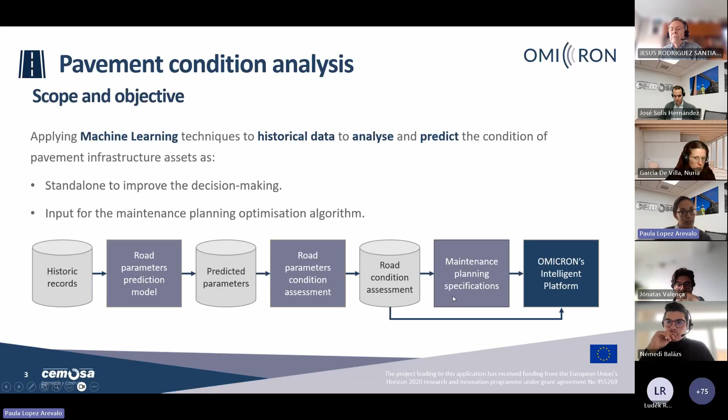Well, now we will go briefly over the methodology applied for this analysis. The first step is the data preprocessing and exploratory data analysis. Whenever we're working with data-driven techniques, there is an internal process with the data for analyzing and managing the available data. The raw data is received, stored and preprocessed to obtain an adequate and efficient structure to work with. And exploratory data analysis is also an essential step to analyze everything that is available. In this case, we get information from inspections: International Roughness Index, side force coefficient, and texture indexes.

And the next step is the data process. In this step, which is an extensive one, there is a series of data science methodologies that need to be applied on the data, which I won't go into much detail on, but are related to the evaluation and parameter selection, the data structuring, rounding, outlier analysis, missing values, and feature selection.

The next step is the approach and model selection. Well, there are different ways of constructing the models in relation to which parameters are introduced, how they are interconnected, and the different time steps that can be selected. And each one of these ways of doing it is what we call approaches. In this analysis, we've tried 5 different approaches. Besides this selection, after exploratory data analysis is performed and we understand the quantity and the quality of the data, different models can be applied. In this case, a linear regression model, decision tree, and random forest are analyzed. And in the end, the model and the approach which provide the best results will be the selected methodology.

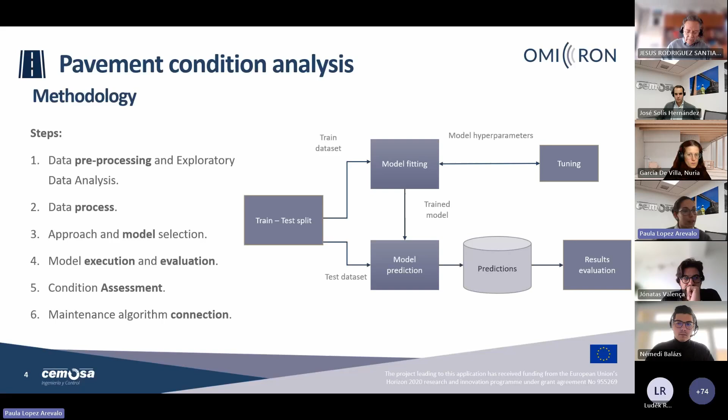In this case, the pavement prediction is based on its input, which is inspection results related to data points. We need to work with that to provide a more adequate structure, which is small segments that can be used by any type of algorithm, any kind of optimization, and any type of methodology that this or any other company may want the outputs to work with.

Here we can go briefly over the results and conclusions. Of course, all the 5 previous approaches, all the models, are executed, and the best results are provided by the random forest algorithm, and also the approach on the right, where you can see how the different input variables and outputs are connected. This model and this methodology provide a mean absolute percentage error of 5.6%.

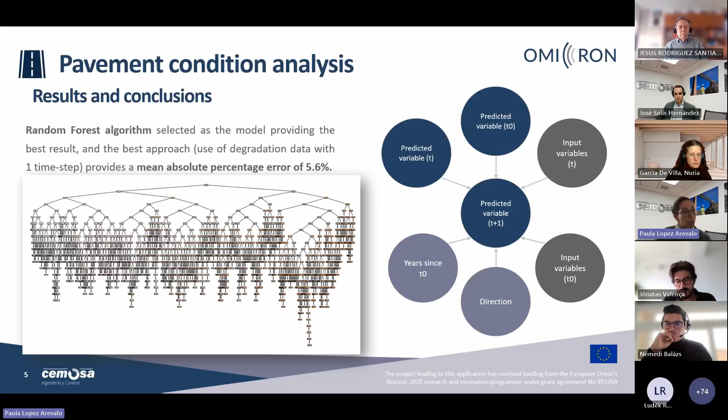Just to summarize, on the left figure, you can see an example of one of the decision trees from one of the random forests that is used for one of the predictions. As conclusions, 2024 road parameters data and road condition indexes are predicted for the road and integrated within OMICRON's platform as a standalone feature and used within the DSS.

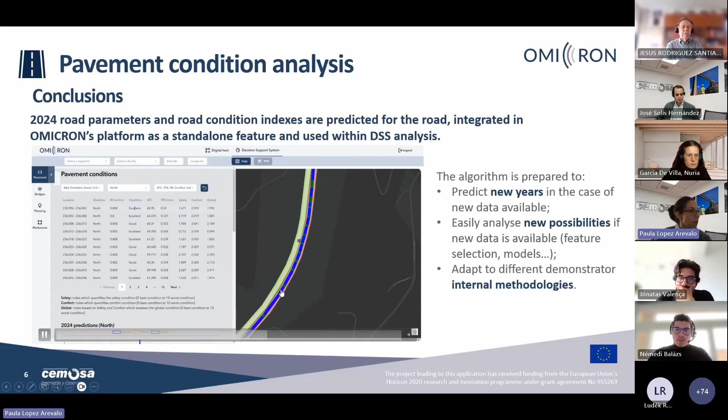Our partners already showed the overall platform, but we thought it would be interesting for you, now that you understand the algorithm, to see the results. On the GIS, you can see different colors showing the state of the road. And on the left side, you can see the different parameters and predictions for the indexes and the parameters in different tables and different graphs.

This global methodology is designed to be modular, allowing for adaptability, transferability, and easy modification. As you can see, new years can be included if they're available, new possibilities if new data from other assets is available, and it can also adapt to other models.

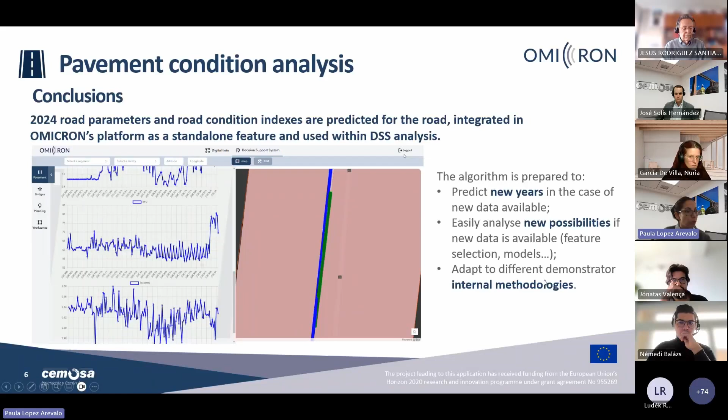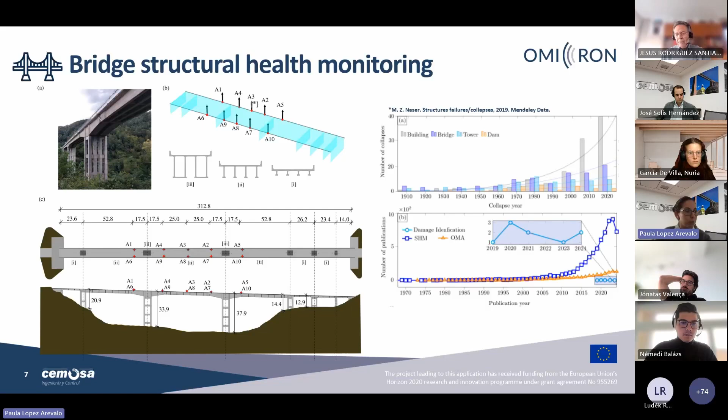This slide shows briefly the workflow of the structural health monitoring applied. As you can see, the first step is the operational modal identification of the bridge using the information coming from the sensors: resonance frequencies, mode shapes, damping ratios. Once these modal parameters are calculated for the different time series signals, it is necessary to remove the environmental and operational variables and to apply the damage identification and damage detection techniques.

Simultaneously to this analysis, a finite element model is created and updated, taking into account the geometry, the materials, and the boundary conditions of the actual bridge. The continuous updating of this model is what will provide the structure stiffness in different areas. I will present all of these parts of the analysis in more detail now.

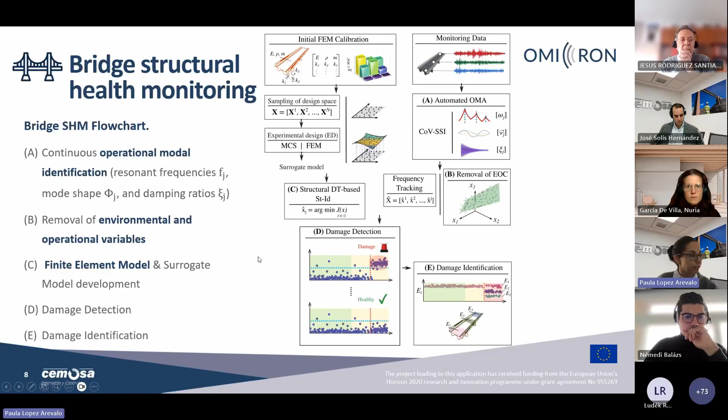As I commented, in the first step of the identification, the baseline dynamic properties are obtained using a time domain technique. In this case, the modal properties obtained are shown on the right side with the 8 modes, which relate to 8 different frequencies and damping ratios.

This first baseline dynamic properties identification is performed, then this is done for all the signals of the monitoring period. The results are statistically analyzed, and as you can see on the bottom part of the graph, they are also clustered. This means that in the end, we will have the evolution of the different modal parameters with time. And as you can see, they are clustered with different colors.

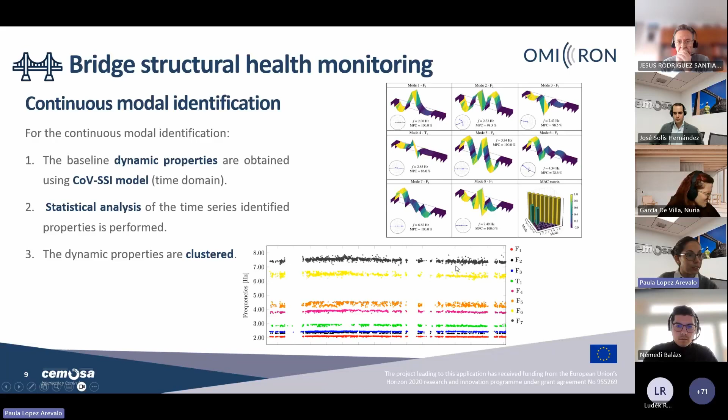The next step, as we mentioned before, we found different day-night cycle, repetitive manners within the data. This shows that there are some external environmental factors that are not useful for the structural analysis that need to be removed. For this, correlation analysis between the independent environment variables and identified properties are analyzed. The air temperature is selected as the proper feature to remove these kinds of effects. And the methodology that is used to remove this effect is a multiple linear regression model.

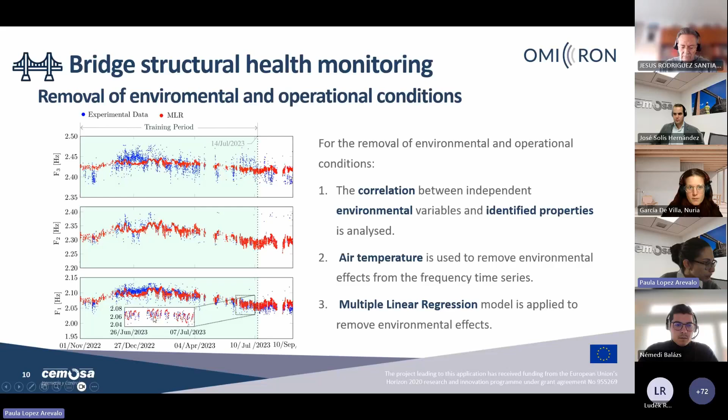In the left, you can see, for 3 of the frequencies identified over time, how in blue the experimental data is showcased and the output from the MLR model. In the zoom, it's easier to see the trends that we mentioned before that needed to be removed.

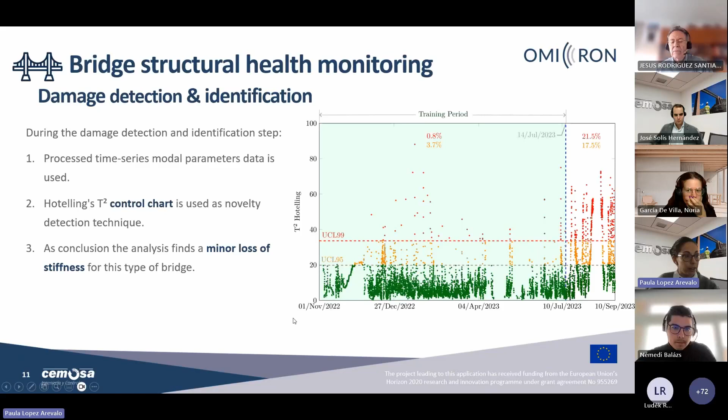Simultaneously, a finite element model, which follows the geometric properties, material characteristics, and boundary conditions of the model, is developed and is calibrated with sensor data. Once this model is correctly calibrated, a meta model is used for the continuous updating, which provides the stiffness multipliers as outputs. As no real data from a damage can be accessed through the monitoring system, synthetic damage scenarios are generated. These synthetic damage scenarios are inserted within the model, and after the trial, it can be seen that the damage can be both identified and located.

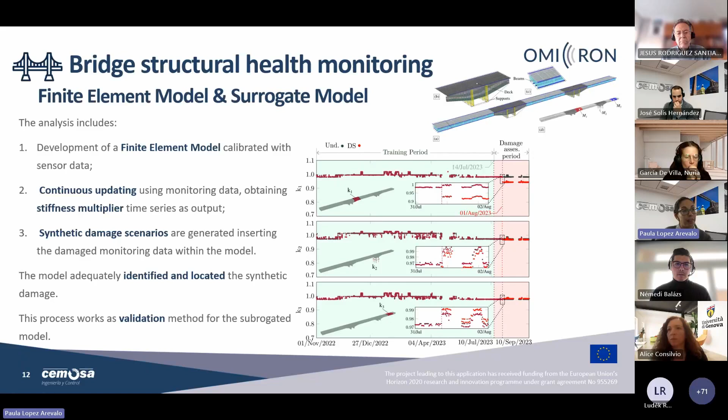This can be seen here in the graph, where the training period is shown for three of the stiffness multipliers for 3 different zones. And when the damage scenario is inserted, even though the 3 areas suffer some variation, it is only in the area with the real damage that the system finds the damage.

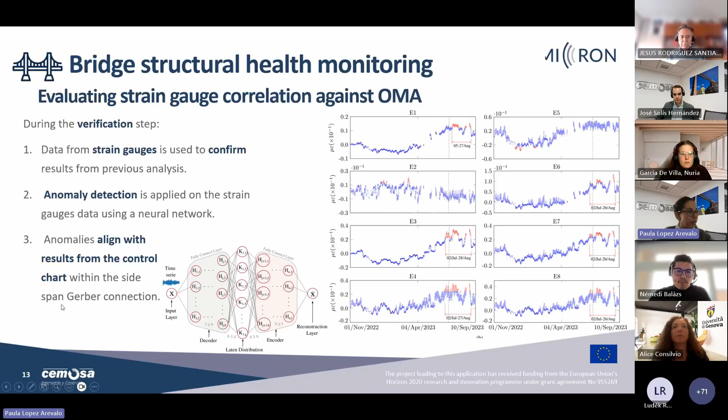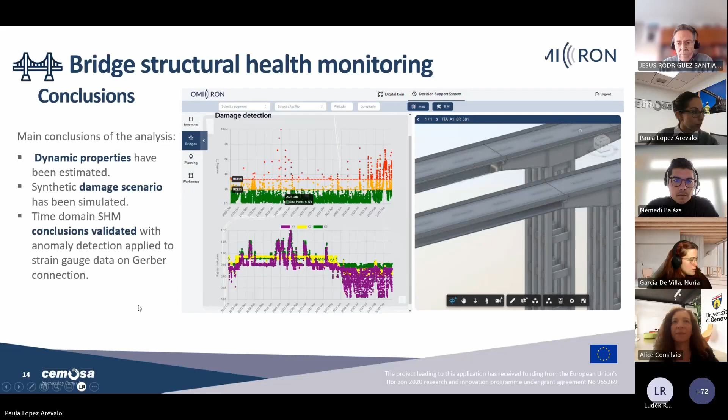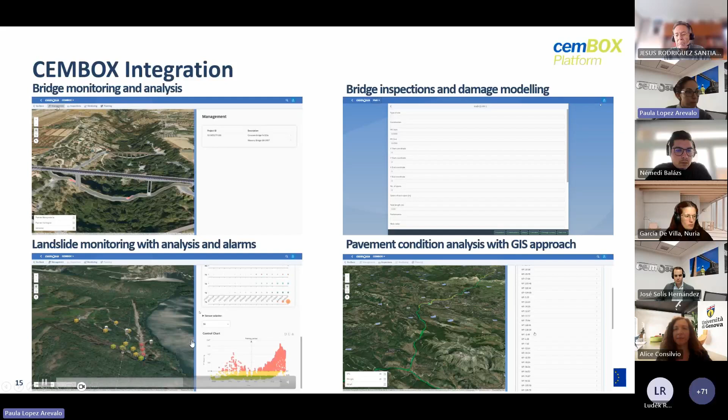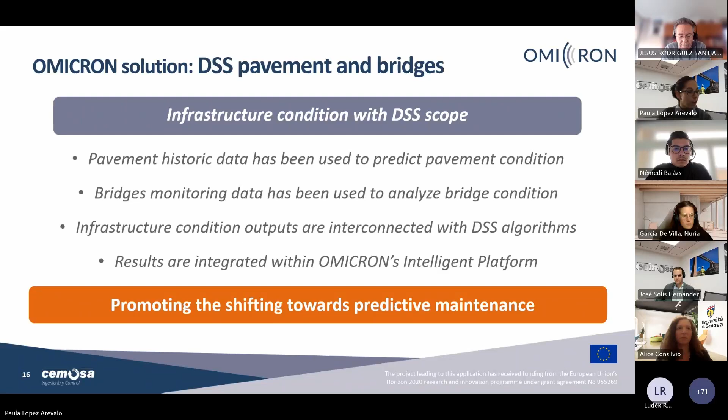So as a conclusion, this was the infrastructure condition with decision support system scope, which aims to promote the shift into predictive maintenance. As really clear conclusions, pavement historic data has been used to predict pavement condition. Bridge monitoring data has been used to analyze bridge condition. Infrastructure condition outputs are interconnected with the DSS algorithm, and results are integrated within OMICRON's intelligent platform.